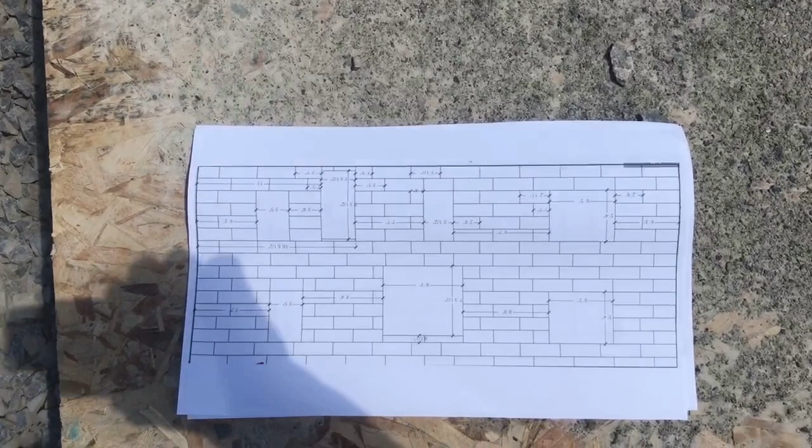plumb and level this. Today is a nice day. I printed a new form, I guess I gotta turn it around,

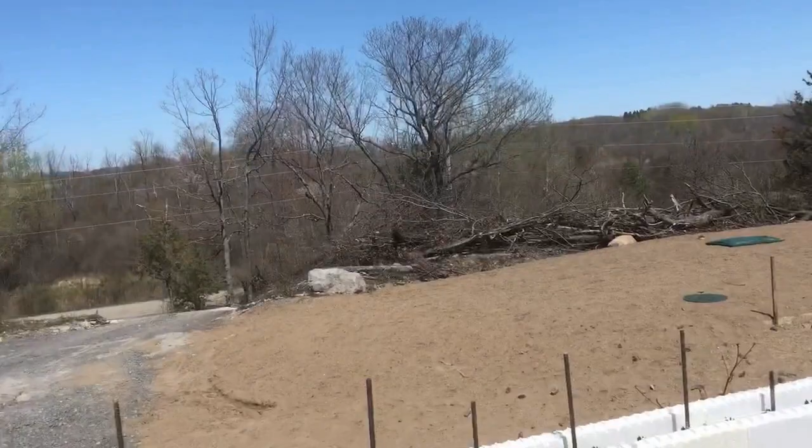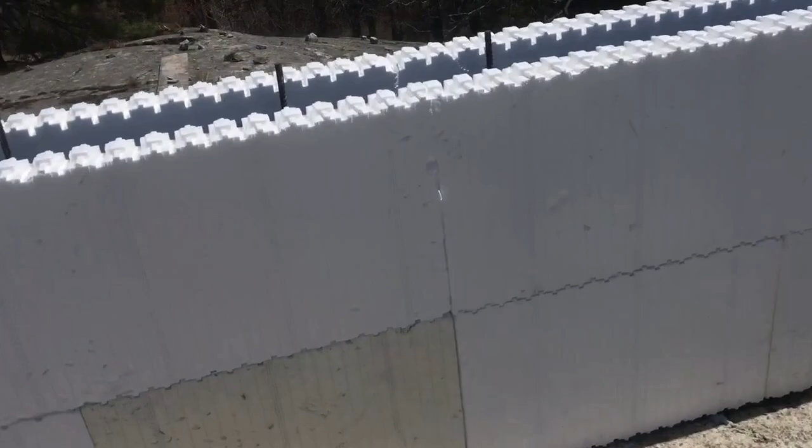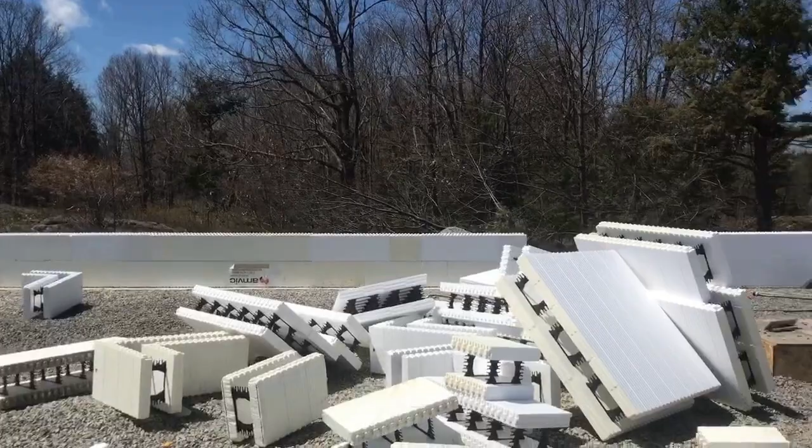and I'm gonna finish the second course on this row. It's easy because there's no seam on this one and there's no seam on that one. It just came perfectly together, so it's easy, quick finish. There is a seam on this eastern side of the wall, that's where my seam is. I think this is the only seam, and then there's an opening, so it works out great. Same on that side - there's one seam on that side and then an opening.

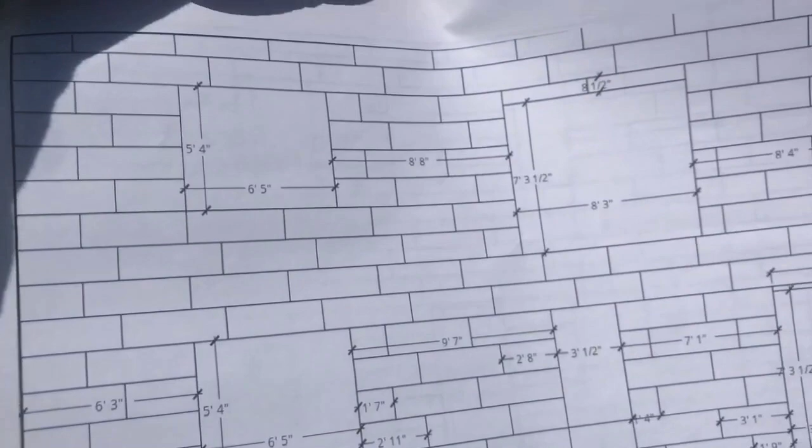So my plan, using Google SketchUp and deciding how I choose to put my blocks together, is a perfect way to solve this. Spend a lot of time on planning in Google SketchUp, and you're gonna have it perfect. As an example, this door that you see, it looks very, very wide.

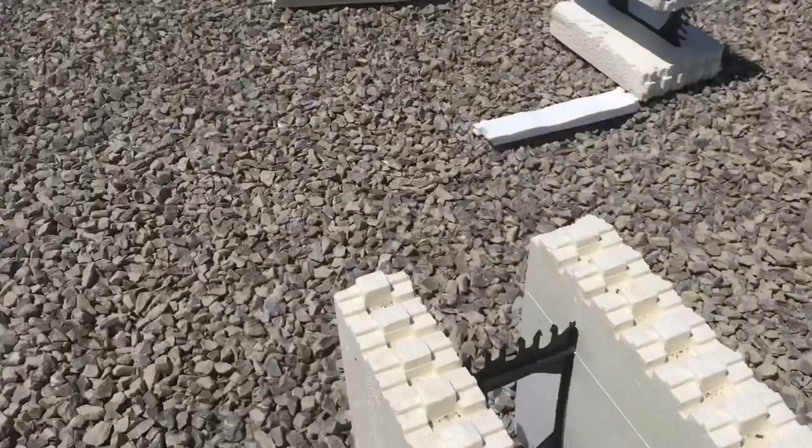Not this one actually, one in the front here, I'm gonna have an entrance way, and the plan for it is actually - never mind the sun. This is the plan for it, and when it's finished - wind problem here - so when it's finished, it's not actually this wide, it's actually smaller. But I can finish it off.

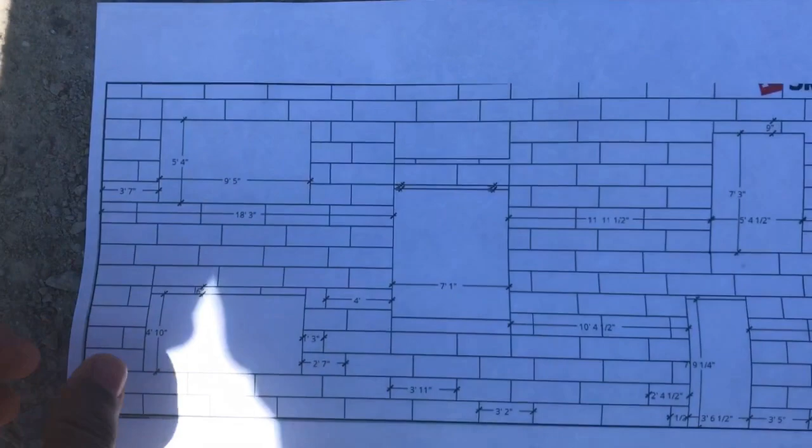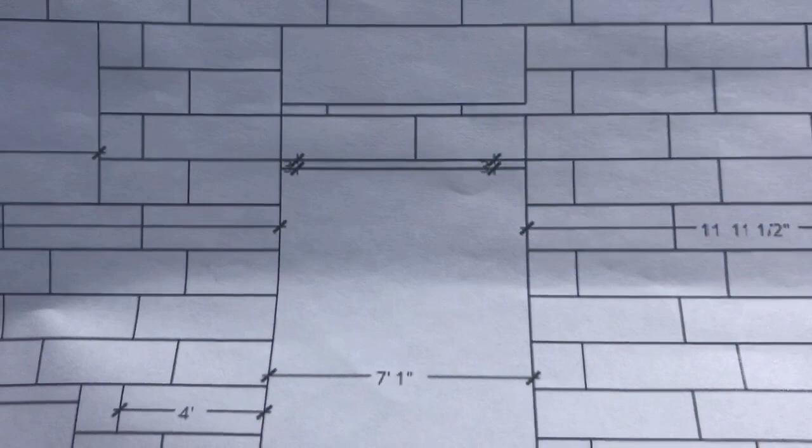Instead of having a 10-inch block, which doesn't make it immune to a blowout, which makes it vulnerable to blowout actually, I just make it wider and have a bigger block around it, so it's not vulnerable for blowout. And then just build up a little bit with foam and 2x4s for the actual opening.

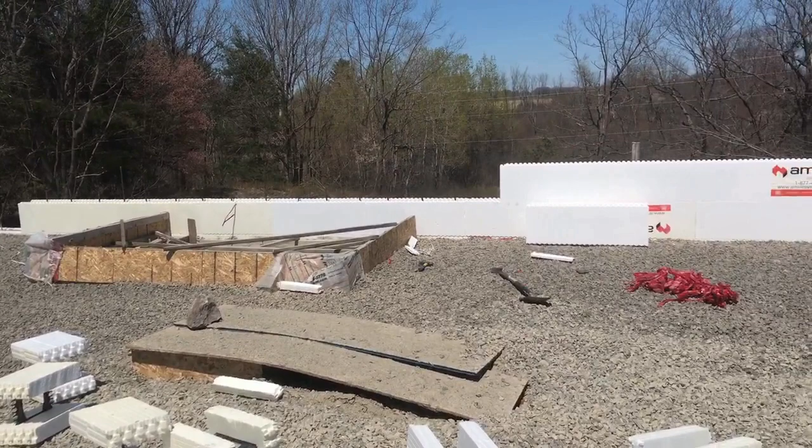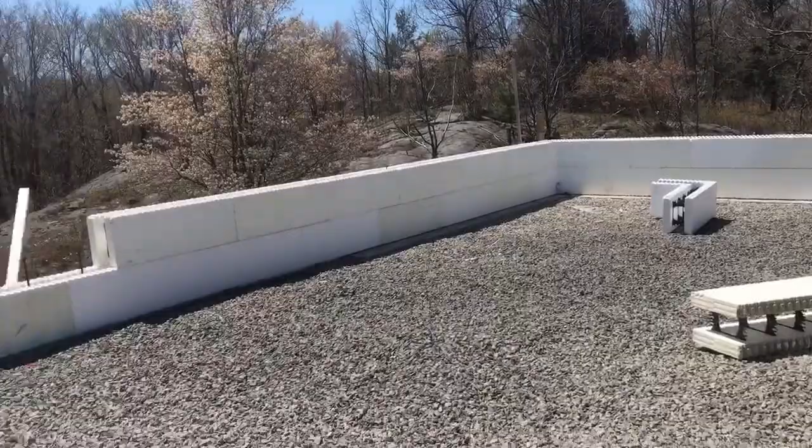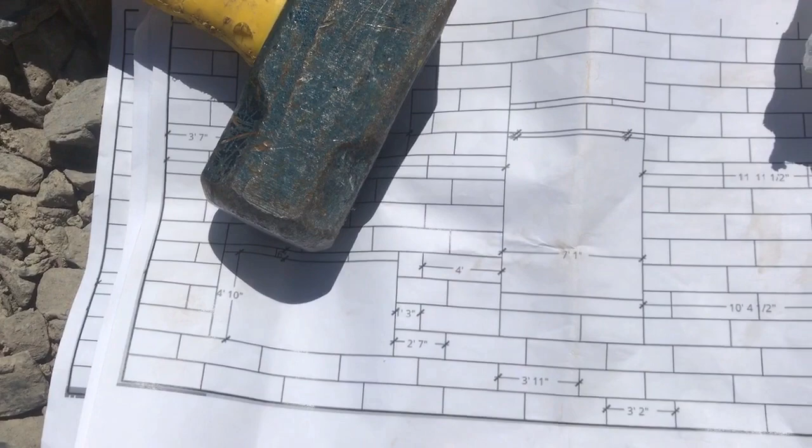Okay, today is a very sunny day. I have a situation here. I wanted no seams on this wall. This is the northern wall, and as you can see here, I'm gonna be forced to have a seam along this line because I built a retaining wall down here a while back.

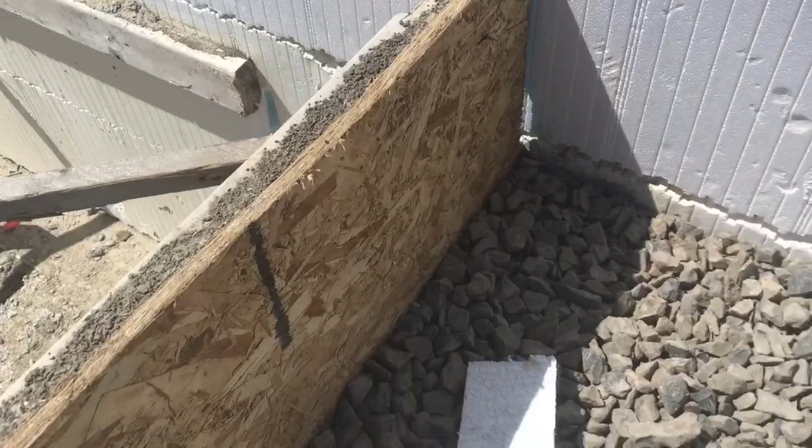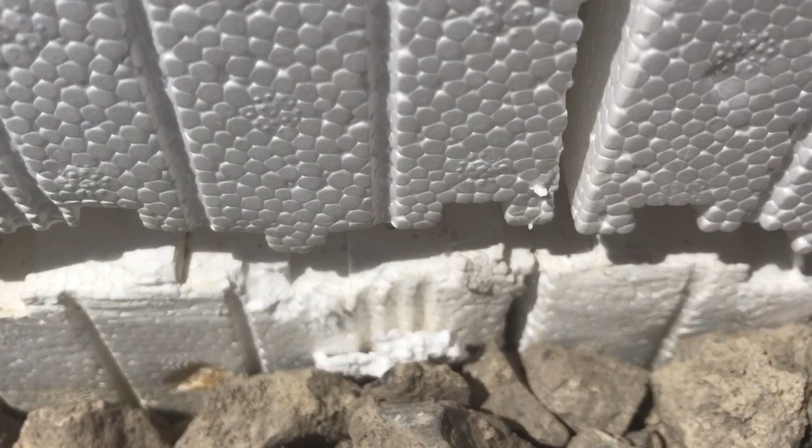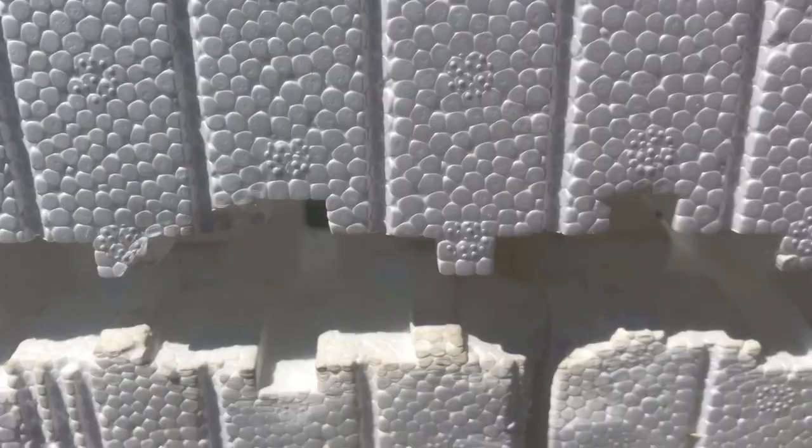So I'll show you, that right there is part of the retaining wall. The other part is buried with this gravel. So when I built that retaining wall, I decided to have a common seam right there. But now I'm gonna be forced to follow that common seam all the way, which sucks because I gotta make a cut right there too, because now that would mean I'm gonna have a common seam along all the way here, all the way.

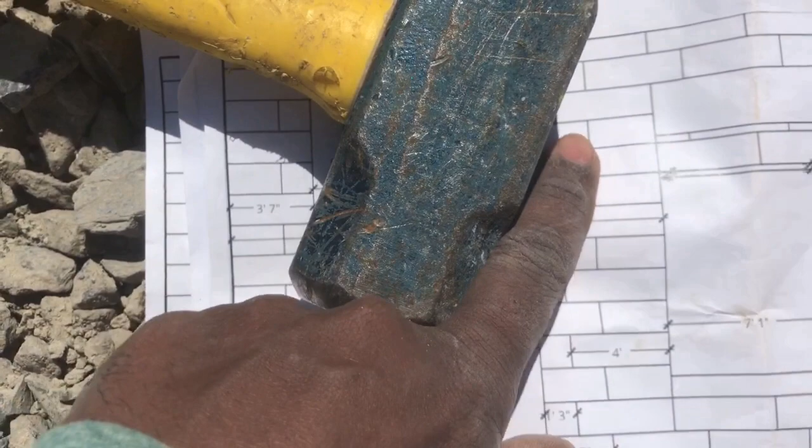I gotta be careful, I need to brace it all across with lots of bracing inside and outside. That's gonna be a lot of work. You know, I planned afterwards - I designed it to avoid common seams, but I already had a common seam on the retaining wall, which is gonna force me to follow it all the way. I did not want to have that happen.

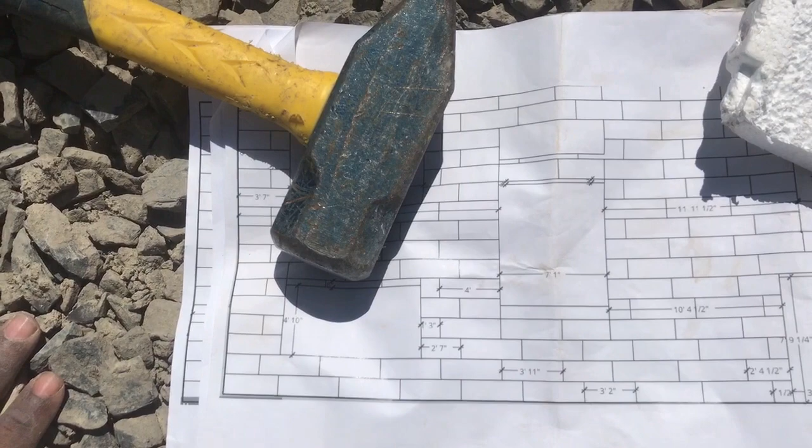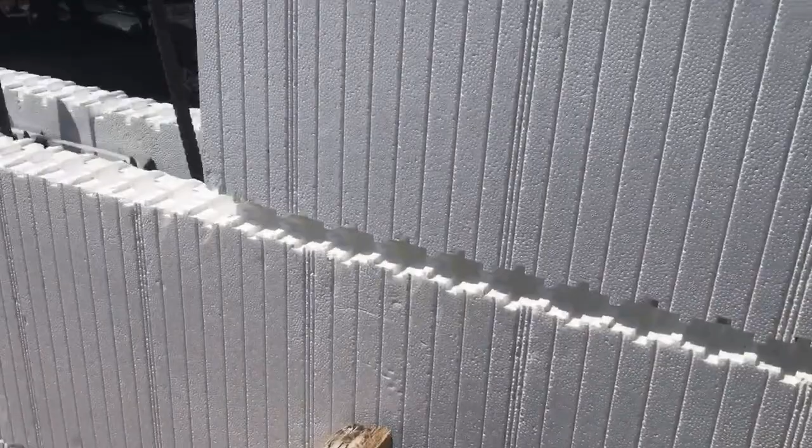Oh well, what can I do? So now that means I have to cut 16 inches here - I have to cut, I don't know where my finger is, 16 inches over here, then remove 1 inch, put the block over there, and then carry it along to finish this wall.

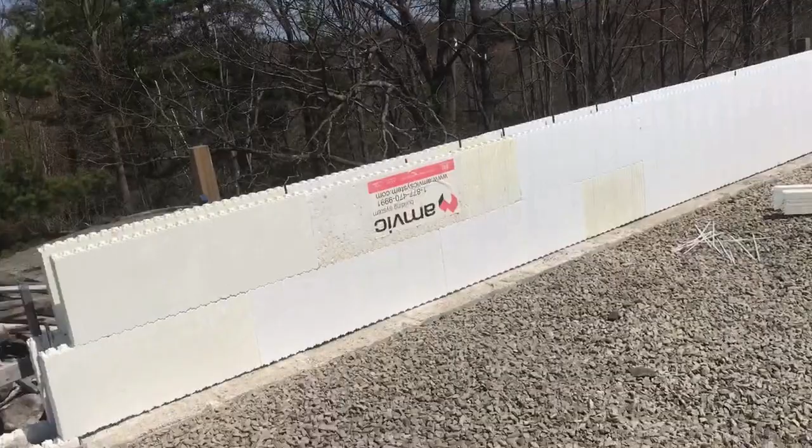So this is the only wall left now. Yeah, the first 2 courses are tedious. You know, lots of measurements, lots of adjusting, because things don't turn out the way you planned it, and that's what happened with me.

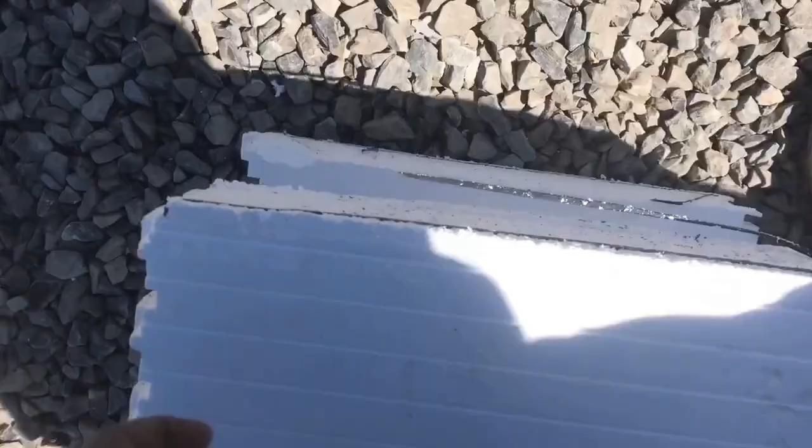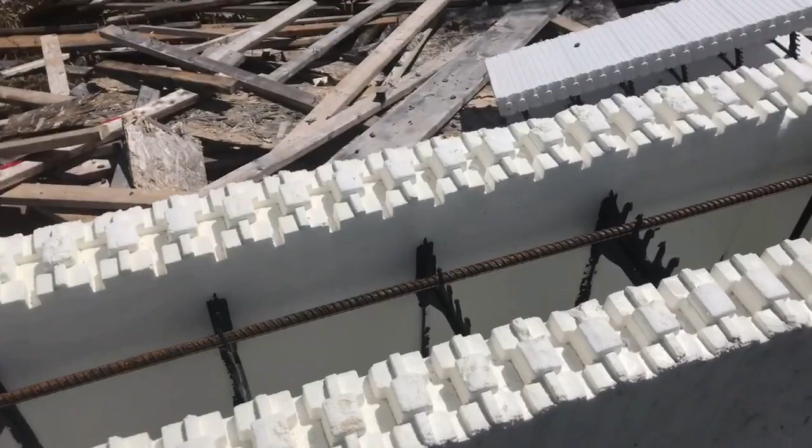Another thing is please avoid a 3-foot or 36-inch cut. When you do a 36-inch cut, you're gonna end up on the tie, one of the ties, and it is a pain to cut it. Yeah, I spent a lot of time cutting it. I hope I don't have any 36-inch wide cuts again. This block here, I chose it to be exactly 36 inches for the window over here, and that's why it took me a while.

Hopefully that's the only opening, and I hope I avoid it the rest of the way.

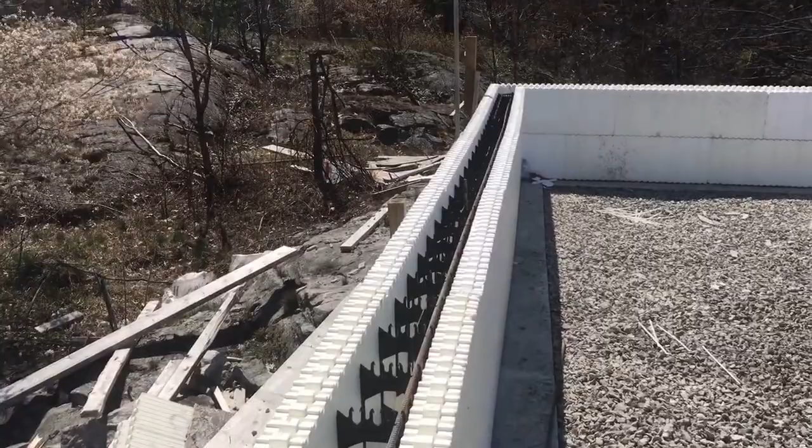You can see the walls are a little bit wobbly, and that's the ICF for you - you have to be careful to make sure that the walls are straight. And that's my next job - I'm gonna spend 2 days making sure the walls are straight.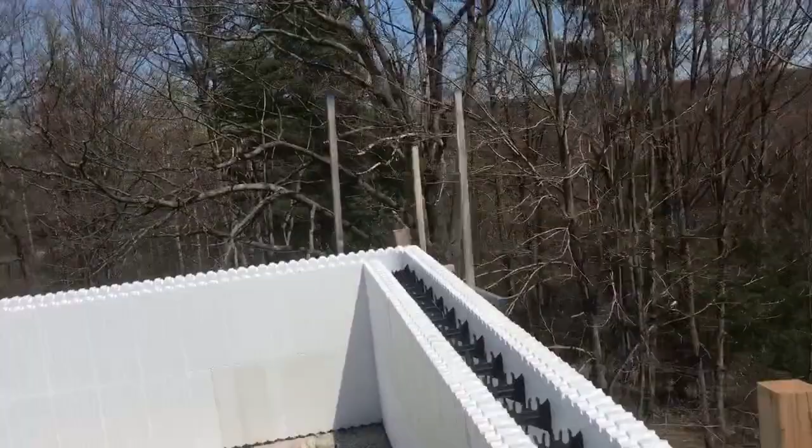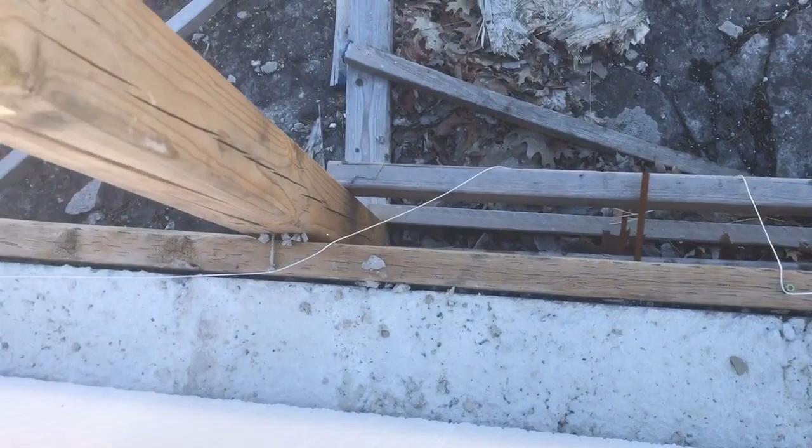The way I plan to do it is from the footing, if I can show you - I don't know if I can show you - I don't want to fall, windy. I have these 2x10s, I left it for a reason. So now I can tie 4x4 or whatever all along this way, and then make sure these walls are straight.

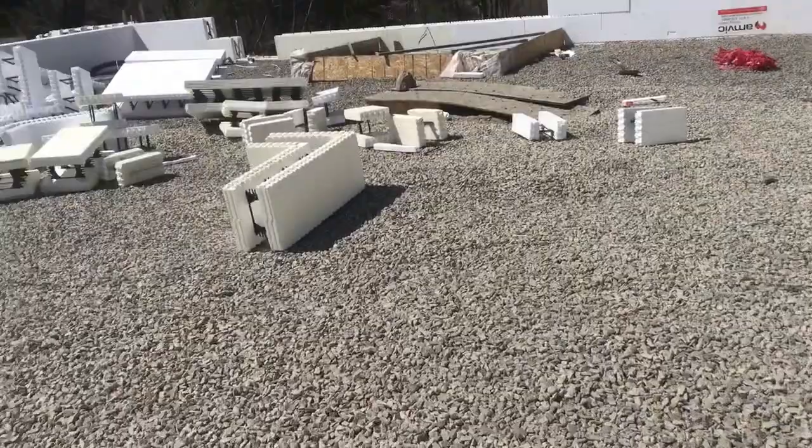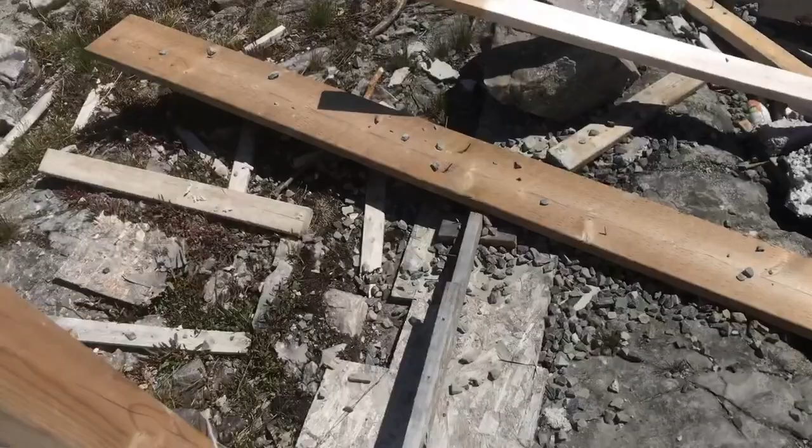This first 2 courses, I can easily do that on that side and on this side. On this side it's a little bit of a challenge, that's why it's gonna take me about 4 days. Yeah, I don't have that many lumbers. I think I have lumber somewhere down there, but not that many. It shouldn't be bad, I have to figure it out.

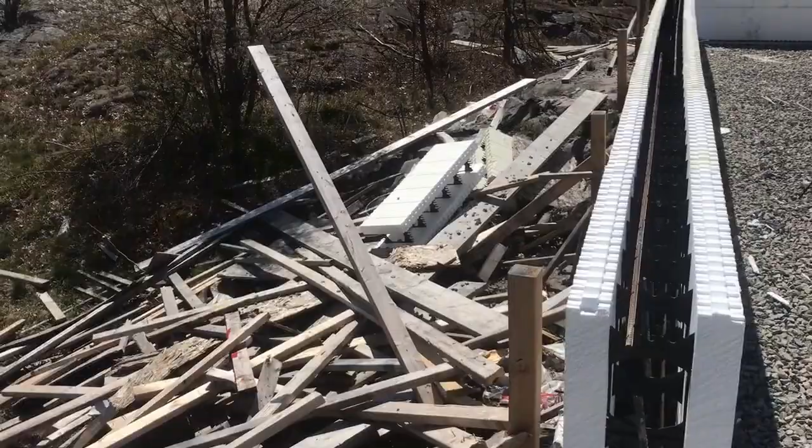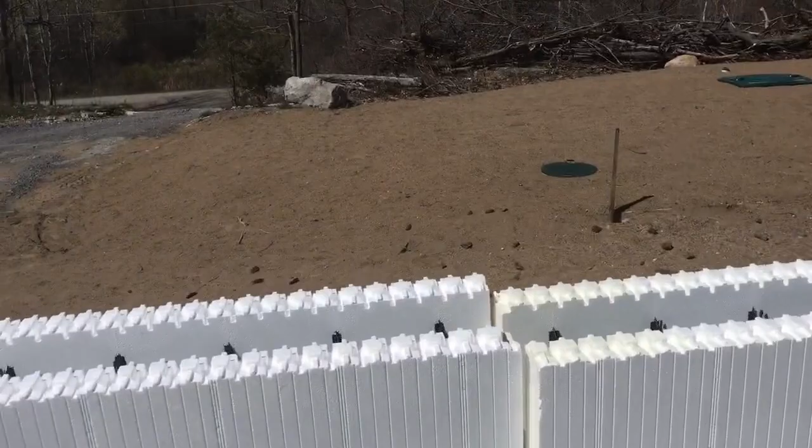Look, and the same on the other side. That side is a retaining wall, so because of the retaining wall it's gonna be a little bit difficult. I think I should be good on the other side as well. Looks like it, I just have to make sure that whatever I put is plumb.

Yeah, I wish I had help, but I don't. I'm all by myself for now.

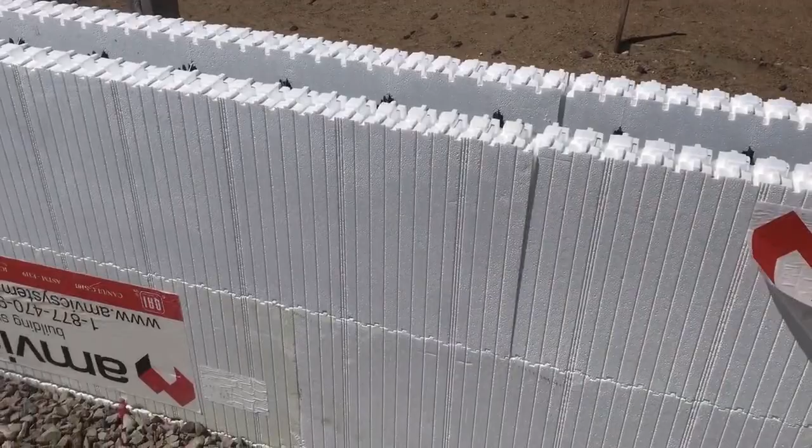Another thing is you need a mallet - your hand's gonna get tired banging on these ICF.

Okay, so I got all the second course done. So this means it took me 2 days to put this together. Now another 3 days to align it, and after that I should be up.

Alright, yeah, the tricky part is making it straight, level and plumb. That's gonna take me a while. Okay, thanks.